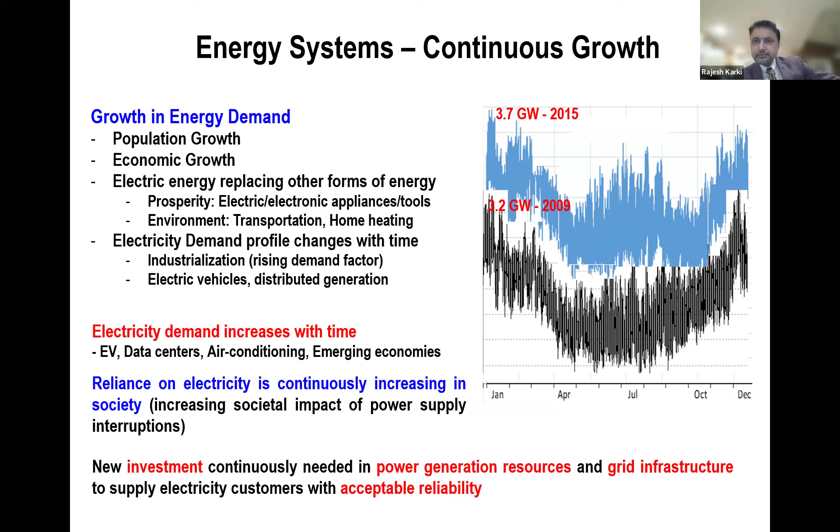Now, why do we have to invest into the energy system to maintain system reliability? Inadequate investment for reliability of the energy supply system means we're going to experience excessive power outages, which means there will be increased power outage costs to electricity consumers. So therefore, we need to invest into the electric energy system in order to maintain reliability.

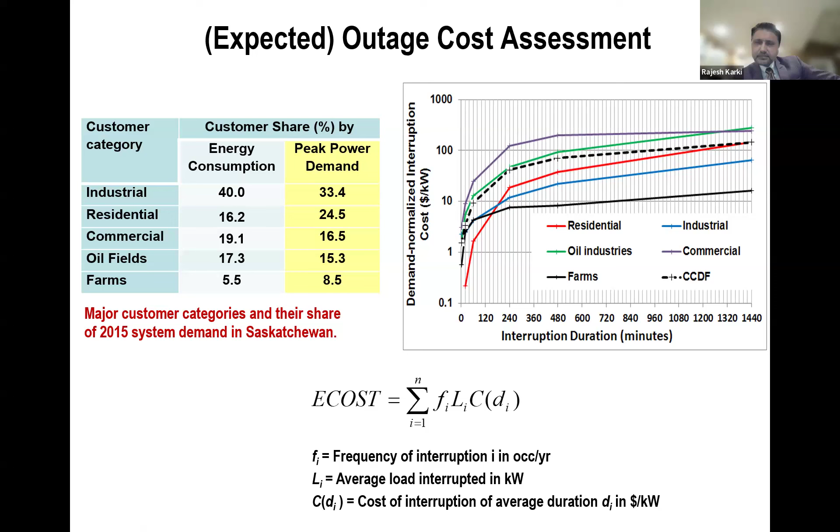So there's a way we can actually calculate that, by knowing the combination of different types of customers in the jurisdiction, and knowing how your dollars per kilowatt demand normalized interruption cost is a function of the outage duration. The longer the outage, the more costly it is. So there's a way we can calculate this.

So this value-based investment approach lets us know what is the right level of reliability we should target when making an investment. That can be done through this value-based reliability investment method. As I mentioned earlier, in order to increase reliability, you have to invest in generation resources.

Now, who pays for the investment cost? The customer pays for that. Who pays for the outage cost? Obviously it's the customer that suffers the outage. So both of these costs are seen by the customer.

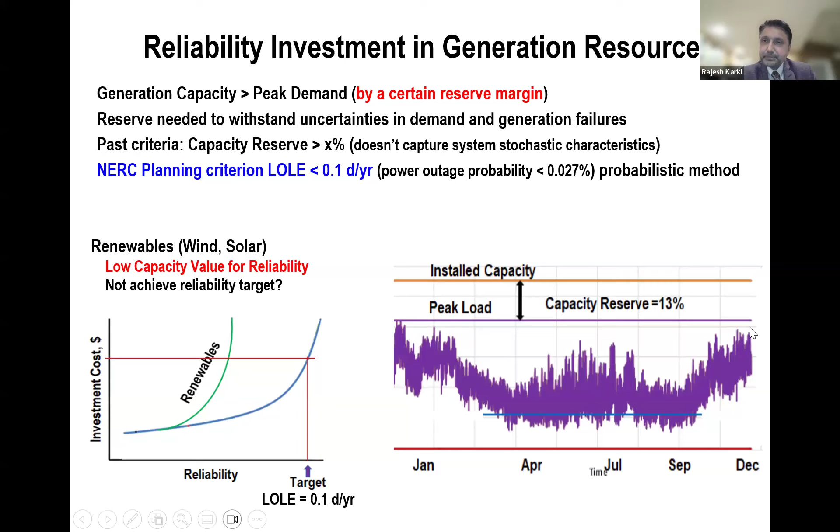A very wonderful presentation, Professor Karki. I just want to ask about the energy solutions, the electricity. But now it is the era of circular economy. So it is said that, for example, electric batteries — the disposal of those electric batteries is harming the environment in terms of carbon emissions and pollution. So what is the solution you suggest for this? Because you are seeing one side of the coin, which is generation of electricity, but what about disposal of electrical products? What are your views about that?

My focus on generation is basically because we're really looking at whether we can afford to maintain the same level of reliability. As I said, since any electric utility's overall investment in the system — over 90% of that is in generation facilities — that's what really dictates the price the customer pays for electricity. My talk is more to do with affordability for customers and reliability, so it's mainly focused on generation resources. That's the broader picture here.

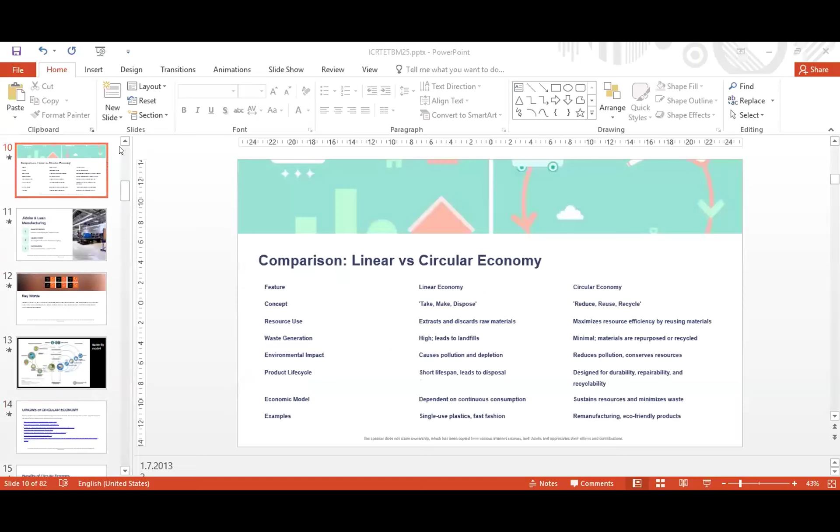Yeah, am I audible? Yes. Sir, thank you, we'll start in one minute. Yeah, we will start in a minute. I hope my slides are visible. Sir, could you please hold for one minute? Now, I would like to call Professor P.K. Kapoor to facilitate Professor H.D. Arora, sir, Vikram Bali, sir, and Shivani, ma'am.

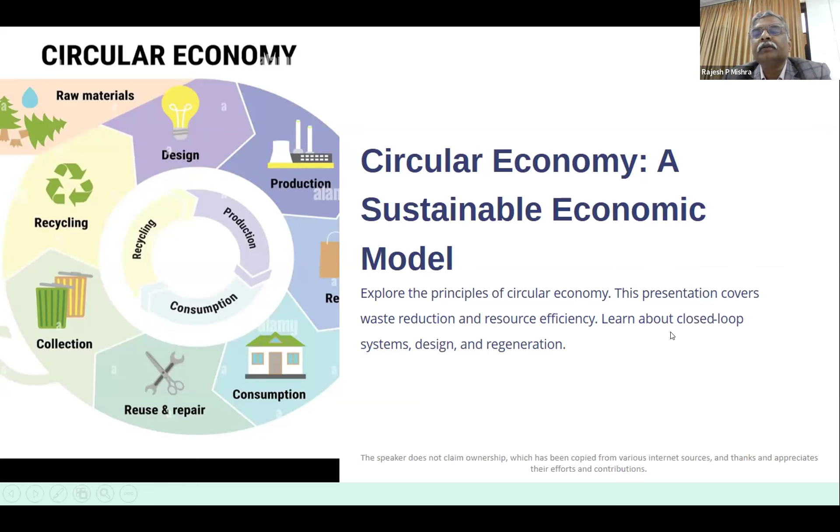So I'm going to talk about exploring and constructing the framework for circular economy. First of all, I want to thank all the people who have designed and developed their frameworks and photos, which I have copied from various internet sources. I'm not claiming those figures are mine, and I appreciate their efforts and contribution towards this field.

To begin with, if we go way back, people started thinking about ecology, climate, and the availability of resources, which bothers the whole world, not only us. It bothers even leaders. You can see all country heads going to a particular place discussing problems like climate change. Probably you might have heard just 3-4 months back.

All country heads met and talked about climate change at the UN. The UN has also taken initiative to develop how we should go ahead in the future, how we should act to save our future generations and their development. Because if the environment is not proper, there will be a shortage of materials, and a big challenge of how they will live, given how abundantly we are utilizing these resources.

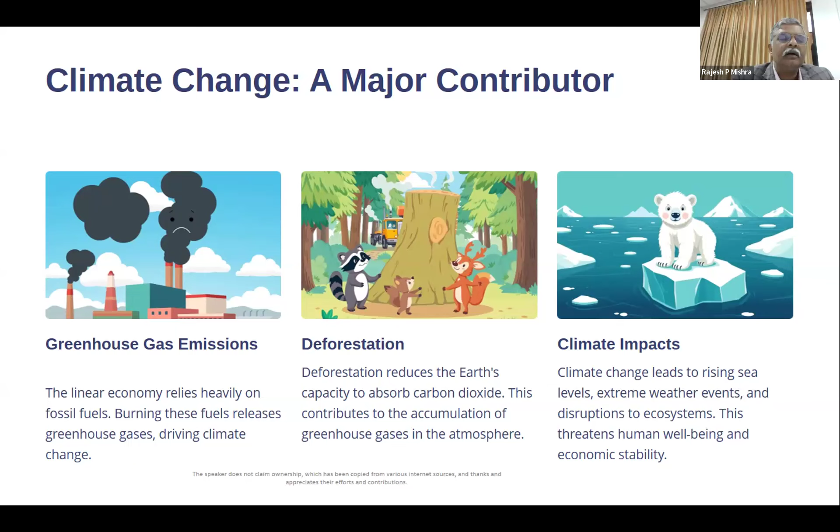So these things are happening because of what we did, and we tried not to understand - we were enhancing the capability in terms of a linear economy. So that is actually bothering.

Once we have these issues, what are the key factors we should take away, and how can we reduce them? Because at this moment, all of a sudden, we cannot go back to the olden day's life and immediately follow those practices. It is completely impossible to go back from 0 to 10. We have to convert our habits and think this through, and this will take us to a lot of challenges and job creation in terms of reducing the effect of a linear process.

So we want to understand how we can do this. It has been proposed by many authors, and I have also started working in this area to understand the circular economy. So basically, what we start thinking is how to minimize first - whatever waste we are generating, how we can reduce it.

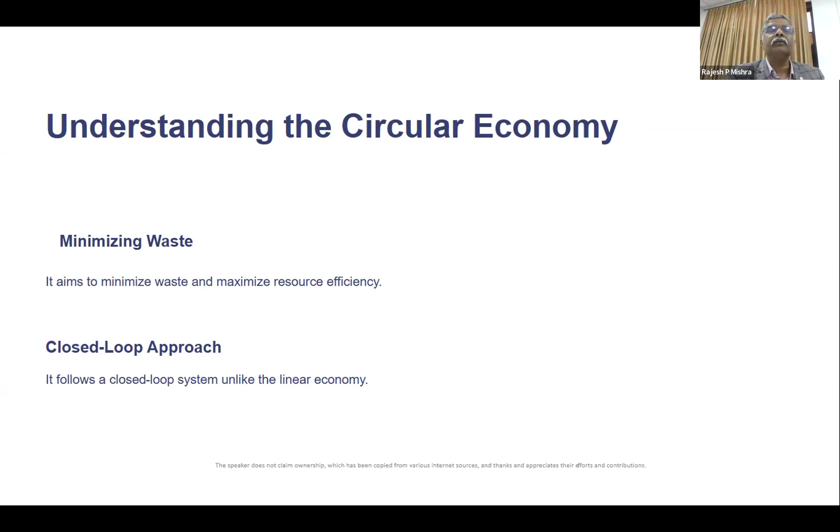We can think of it a little bit like a Kaizen process. We can try to minimize the waste, and we should work in a closed loop. I will show you the diagram and talk about how we can work on a closed loop.

Basically, the key principle which can make the linear line into a circular or curved form is that we should try to discard throwing out the material, or start building a habit of eliminating the waste. So we have to have a lot of solutions for it.

We should start understanding from the design how we take the product and think it over before taking the raw material to convert into manufacturing. How can we design it in such a way that it will be in the circle for a longer duration, and we can try to dispose of it properly. It will be impossible at this particular point, but when we start thinking toward that, definitely we will get some other alternative processes and systems.

Another important thing is the key product which we are using - as we are assembling and converting into one product, you can see if you look at a bike, car, or truck, there are hundreds and thousands of parts which are converted into that one product. Or there are many other electronic devices that may have more than 10 to 20 types of material assembled and converted into the form of one particular product.

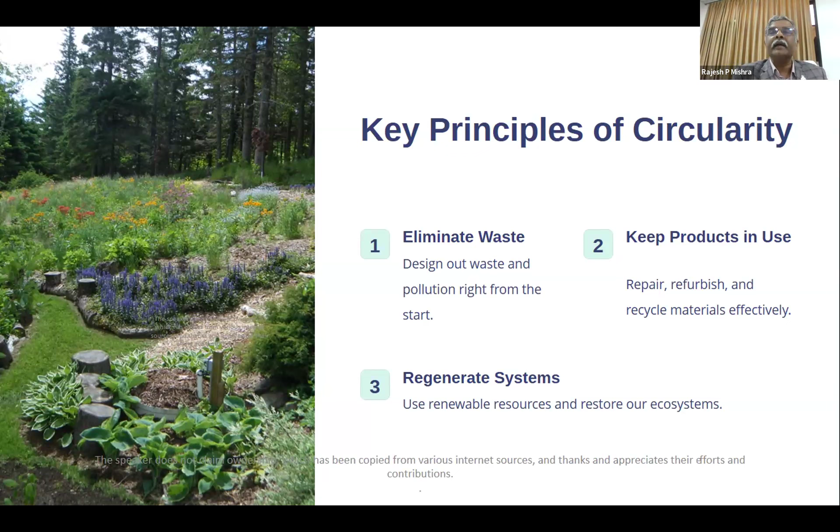I'm just commenting that it's not like things are not happening. Things are happening, but it could happen at a much faster rate than what we are doing still, so we can restore our ecosystem. Looking at these challenges— excuse me, sir. Yeah, sorry, yeah, to interrupt you. Yeah, I'm on the way, I'll tell you the proposed things. I'm on the right track, please do not worry about that.

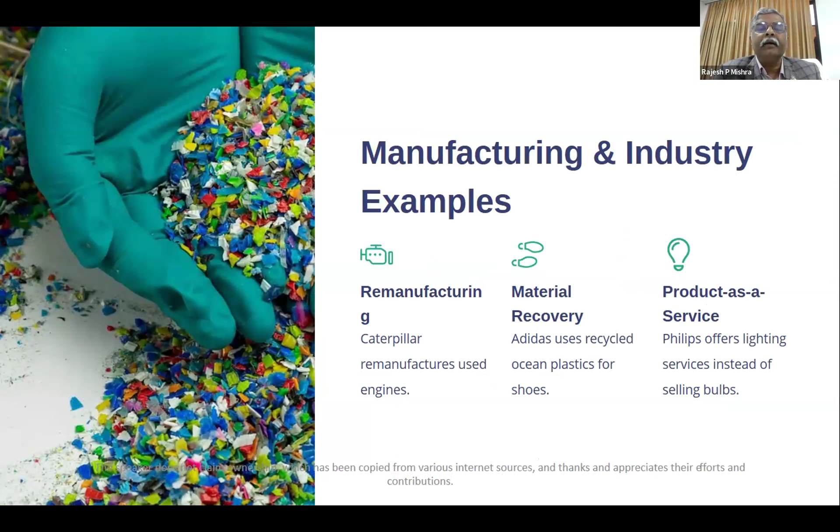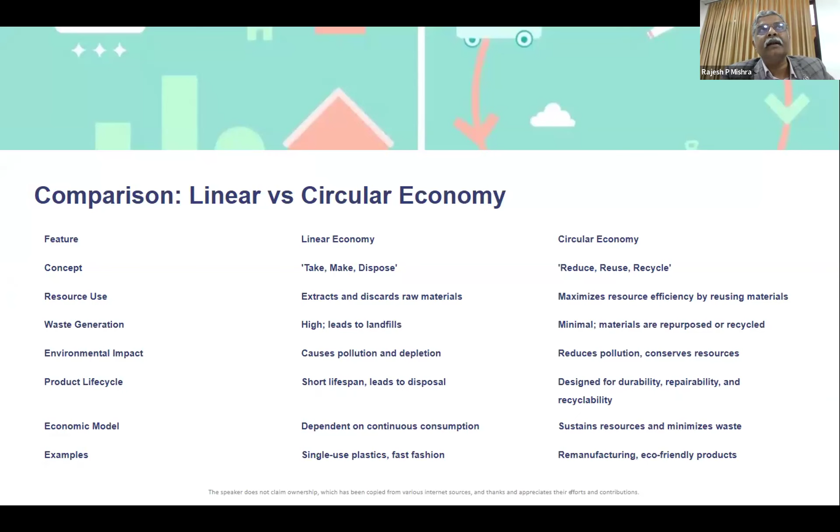So thinking of those challenges, there are alternative solutions available. We have done some case studies, comparing where things have a major gap between the linear and what can be a circular economy concept. Looking at all those concepts, as I've told you, materials can be converted into two types.

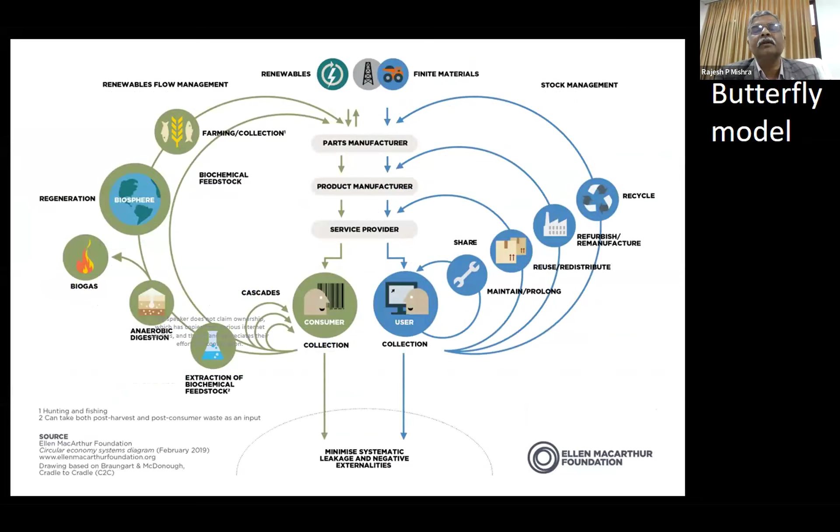One is technical material and biological material. Biological materials are very good to use and dispose of, and there are a lot of methods available that can be disposed of easily back to their original form. But the problem will be mostly with the technical material. So these are the studies we have done.

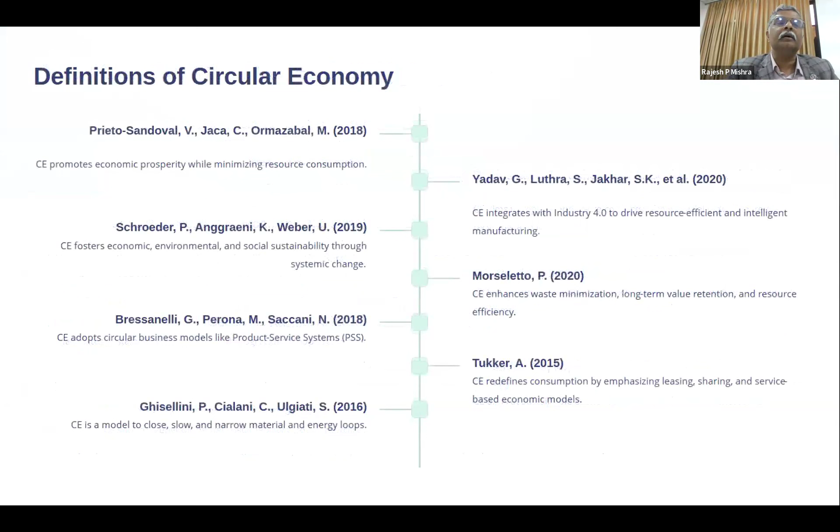The literature review about the present knowledge in our academia—present knowledge available in academia. So our two research practice students tried to collect the definitions and understanding of the system that people have proposed, and we tried to convert that into how many times they coin keywords like recycle, reuse, reduce, and recover.

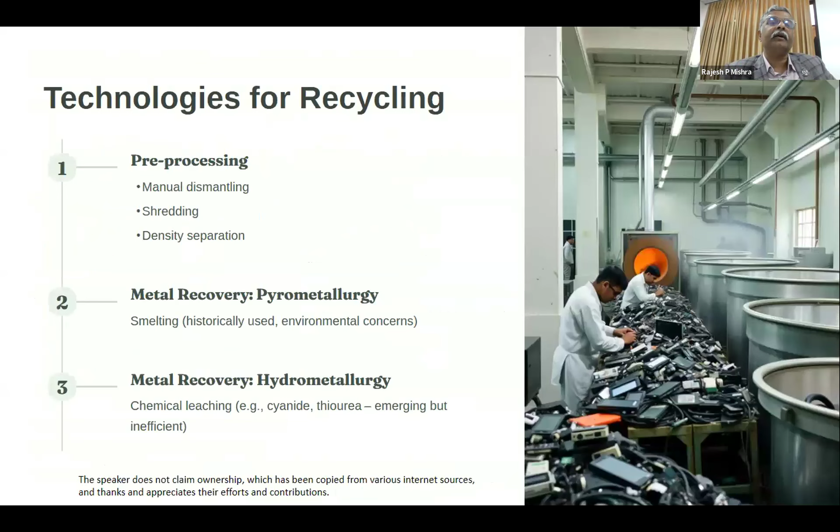One is the case from Indore, and we were able to understand what kind of technological challenges are actually required to handle those issues, and what are the key features which can be taken into our concept and utilized, so a good framework can be developed to solve whatever challenges exist at this particular stage in the manufacturing sector.

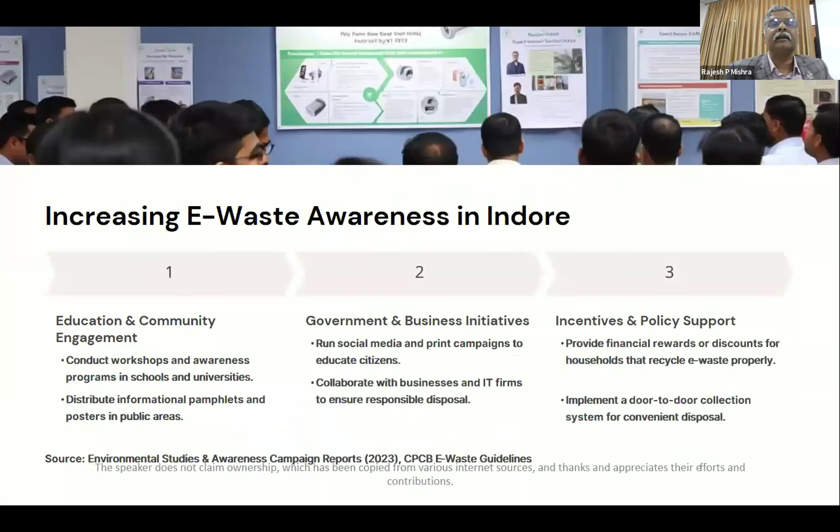So our students have done two case studies which are already present in the literature, and we came up with an understanding to develop a model, trying to understand the given situations and given resources available for the framework.

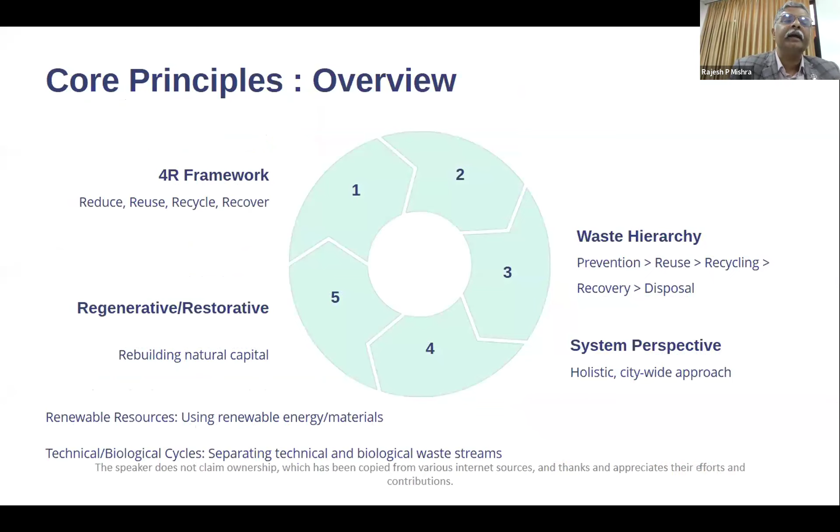So we are trying to propose a more practical framework for our community, which can be implementable, and there will be less hurdles imposed since we are tuned to it, meaning less hurdle to the process.

So that is what I wanted to highlight—these issues and challenges. And we are also coming with proposed solutions which can make them possible; it cannot be taken immediately, but slowly and sequentially it will help reduce the obstacles or problems which are making a differentiation to a sustainable system.

So in conclusion, the feasibility, benefits, and principles we have gathered—we are also trying to investigate the core principles and develop a framework which can be measurable first, for whatever the companies or municipalities are trying to show.

So if we are able to measure, we can set up the current state—this is the current state of whatever work is going on towards the circular economy—then we can set up a goal. So we can have a clear understanding of the gap, and then we can tackle those issues.

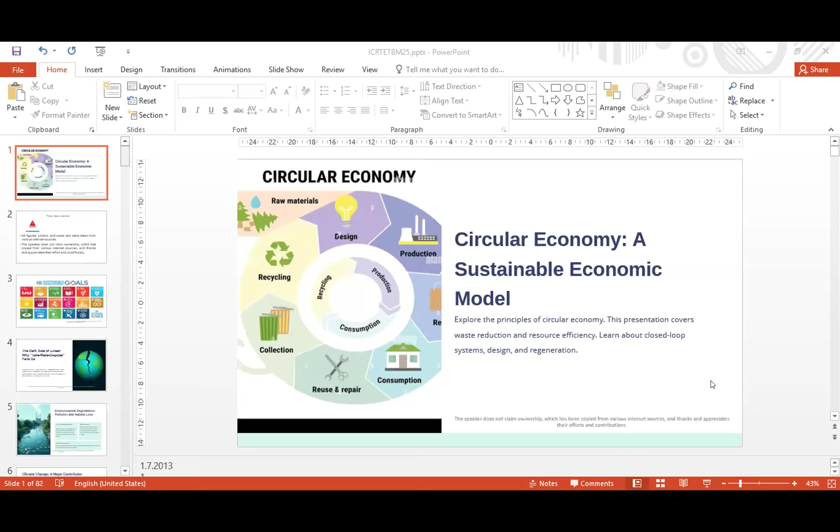Thank you, and once again, sir, pranam to Professor Kapoor. I can see from the back that he is sitting there, so please say hi to Professor Kapoor. Thanks, Rajesh, for coming. Sorry, sir, this time I could not touch your feet. Thank you, sir, thank you so much. Now I would like to call Professor P.K. Kapoor, sir, to felicitate Dr. H.D. Arora, sir.

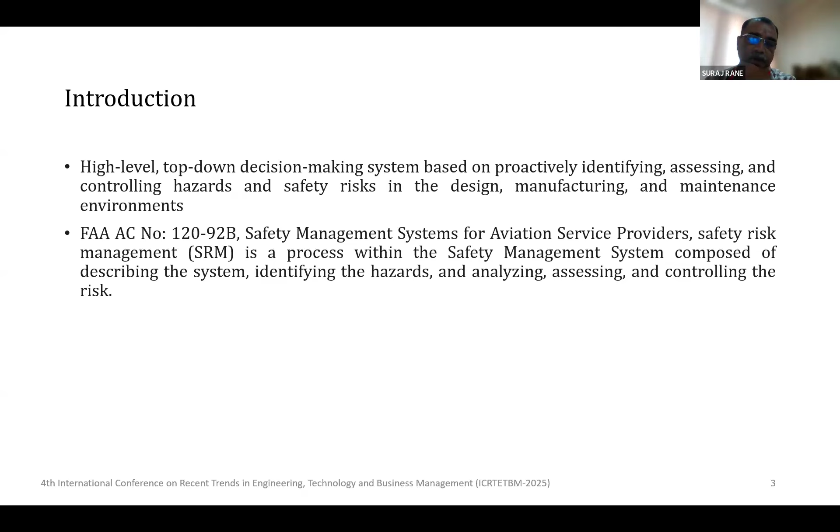What are the objectives in this three-step process? What do people normally follow? The objectives are: we need to identify the hazard, express how it will affect operations, what will be the impact on operations, and how to reduce the chances of causing an accident due to this hazard.

When we do this, we need a complete holistic approach to that process so that we always have things in our control. Normally, we give priority to what we know about the system rather than what we should know about the system. That's the reason some accidents will always creep in.

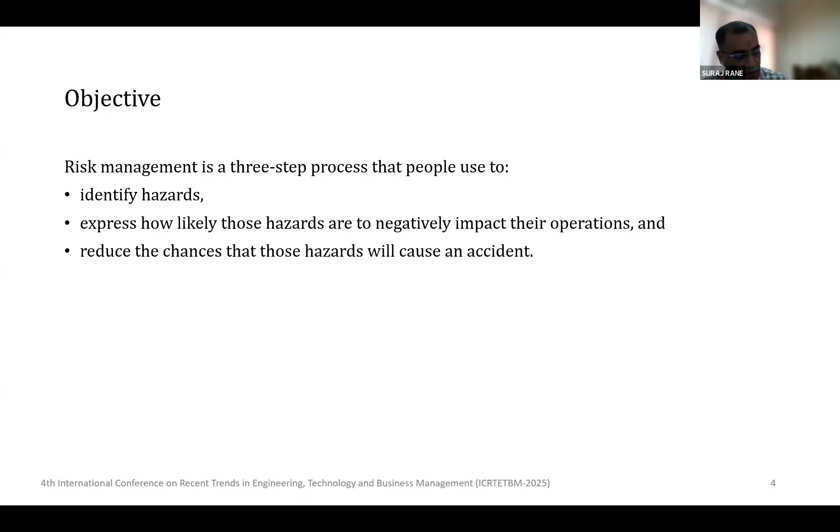I have personally witnessed one incident where the investigation revealed it was a minor flaw which led to catastrophic damage. That particular industry could have saved many people's jobs, because life was not lost, but for a long time the company was closed and jobs were lost, which created lots of social issues. So we have many impacts, not only on operations but also on the employees. We need to take care of those things in deciding how to handle hazards.

Why is this needed? When we go for an accident-free organization, we always get reduced insurance premiums, because insurers see the past record of how many accidents have taken place, and premiums are fixed based on that. Then productivity is improved because no accidents means no downtime, and no downtime means more productive, value-added time.

Since there are no accidents, we have less legal cost and less or no compensation at all, because these are the things which lead to unnecessary cost burden on the company. Finally, the overall reputation of the company is at stake. People in social life will always remember a company for a particular incident. Nobody will talk about the cost, compensation, or premium increase—they will talk about the reputation loss. That is why most companies require accidents not to happen in their plant.

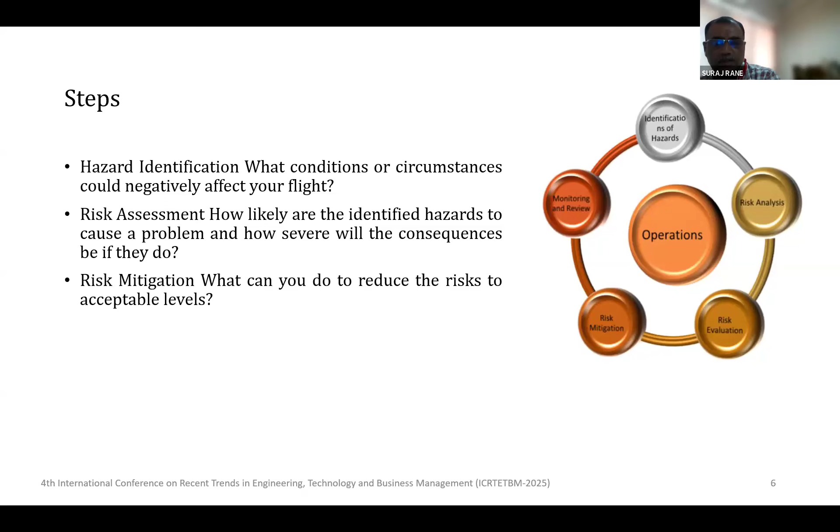What are the steps which are basically required here? In short, we need to identify the hazard, assess the risk, and mitigate the risk. The diagram shown is a standard one used to explain these steps. We identify in a particular manner proactively what to do, how to do it, and how to solve it, because these are proactive actions—otherwise it becomes a breakdown type of effect on safety.

As far as the procedure to conduct the risk assessment, we need to prepare and follow a checklist for the risk assessment. This is always done in consultation with the OEMs of the component as well as the consultant who designed the entire plant, because it is not just individual components that are at risk, but also the connections between components—since a small error at the connection stage can create a bigger problem.

Once your checklists are ready, analyze the past inspections and injury reports, if anything happened before. If not, then maintenance records have to be seen about where the maintenance people have encountered any likely flaws in the process, product, or quality of the product. Sometimes maintenance or equipment quality results in poor quality in the component being manufactured, so that also gives an indication. That record has to be seen if you don't have any accidents till now.

Then prepare and update a safety plan. Based on the past record, if you get something, try to observe that component or similar component, similar situation, similar mitigating or instigating factors, and see whether, as on date, all things are in place. Then check whether we have a safety plan. If you don't have one, prepare it. If you have, update it based on the past report.

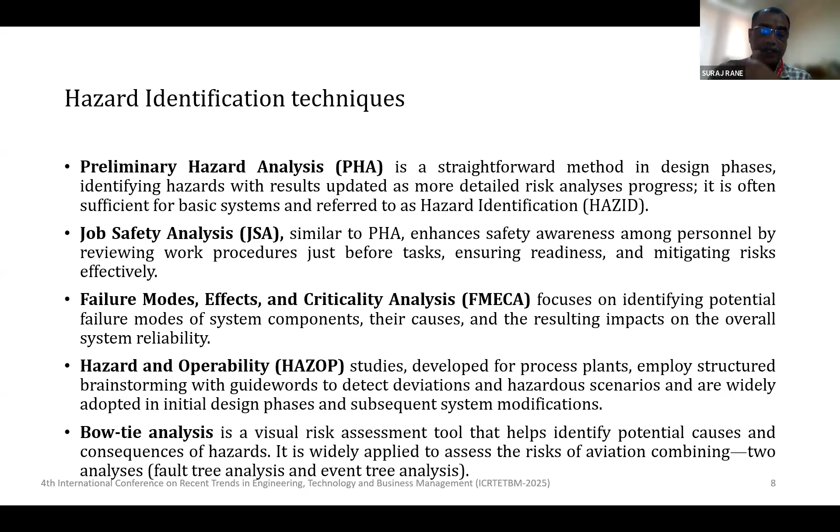Now a small case study - an ongoing process - applied in a hydraulic pump assembly unit exporting the component pump to many places across the country and outside also, where the pumps are mounted on a vehicle.

First, in hazard identification, we identified the moving components of machinery, electrical system, and manual handling of heavy components - all hazardous things present in these types of components. Then in the risk analysis phase, we evaluated the frequency and severity of each hazard, identifying high risk areas such as the assembly line and welding station. Once components and hazard situations were identified, we identified the high risk areas, then moved to risk evaluation, prioritizing risk based on likelihood of occurrence and potential impact on worker safety and production.

In the evaluation phase, we try to check how likely that hazardous situation will create some risk, and what is the effect of that risk on the employee and the process or production. Once you evaluate it, we come to know how risky it is to go ahead with that.

Then we control the risk, implementing engineering controls such as safety guards, emergency stop buttons, administrative controls like safety protocols, regular maintenance schedules, and provide PPE like gloves and safety goggles. Depending upon what the process is, whether it is temperature based, heat based, or chemical based, we need to have a control system on that.

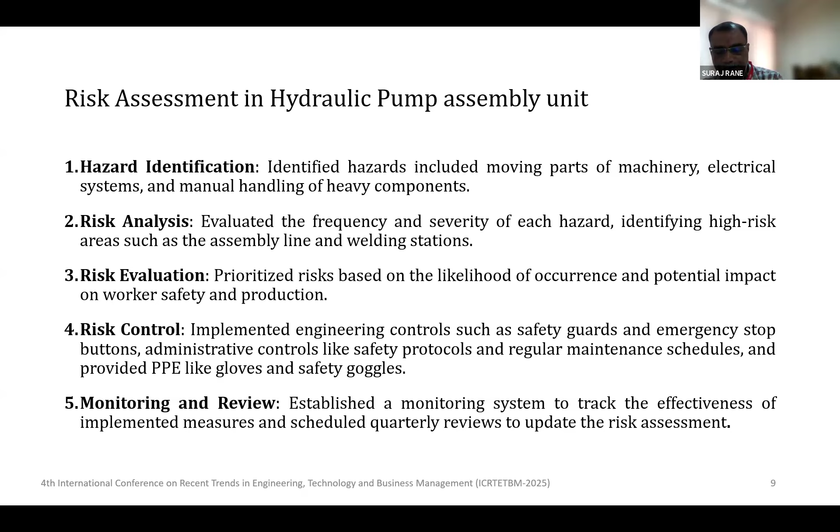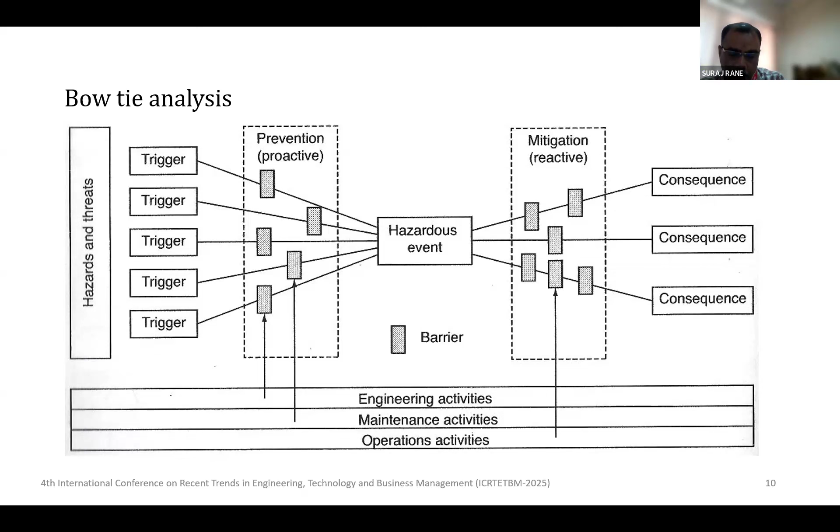In this industry, pump industry, the bow tie clearly indicates the top event in the center, the potential event, and on the right side, the potential consequences. The summary, whatever I just told you, is there on this.

Now, in this case, pump related hazards, what all things can happen here? Pump cavitation, a sudden drop in pressure causing vapor bubbles, air bubbles to form within the pump, leading to damage if not controlled. Second, hydraulic shock, sudden pressure changes due to rapid valve closure potentially causing pipe damage. Then pump seal failure, leakage from the pump seal potentially releasing hazardous fluids.

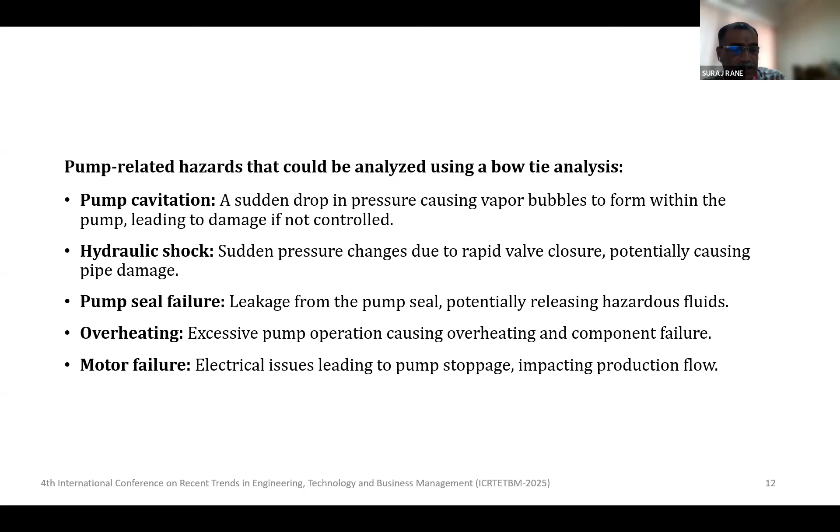Then overheating can happen, because of excessive pump operation, causing overheating and component failure. Then motor failure, electric issues leading to pump stoppage, impacting production flow. All these are things possible in the pump which we have taken for study, and this was done in an environment where some things have failed earlier and some things have not failed earlier. That means reactively and proactively we have to list down all that.

Next tool is FMEA, where if you see, the third column is mode, M, fourth column is effect, E, and analysis comes on all other columns till the RPN. RPN is the number which will tell us which component or which part or which failure to take on priority basis.

Row wise, first component is seal, then bearing, shaft, impeller, casing. For each one, we try to find the mode, find the effect of failure, then how this failure occurs, what is the severity, then what is the chances of occurrence, and the detection. And you multiply all three numbers in the last three columns, column number 6, 7, 8, S, O, and D, and you get the RPN.

5 into 3, 15 into 2, 30. That means whichever RPN is more, like 126 for impeller, component serial number 4, that has to be taken on priority basis. So all those things have to be listed down to study how this can fail, what are the effects, and what to analyze.

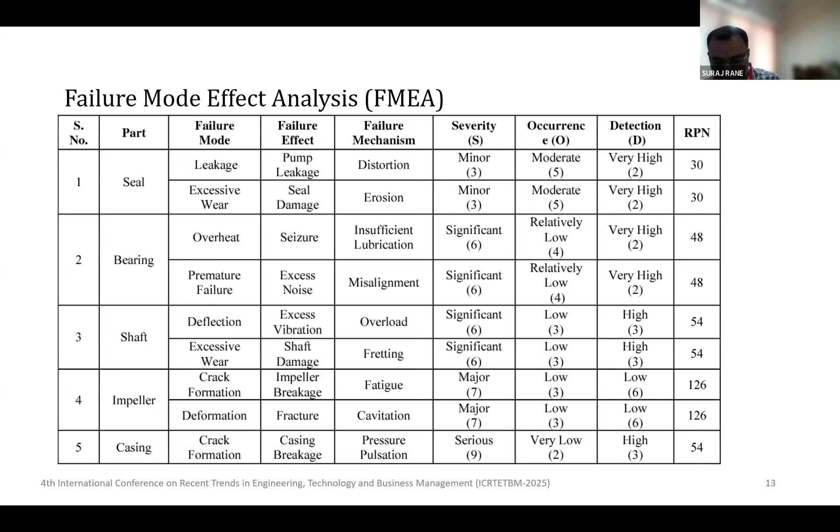So these are the three tools and the procedure for safety risk analysis which are used. In conclusion, this particular technique identifies hazard-based critical events. This strategy helps in understanding the relation between components and its role in plant operation, reduces damage to plant and reputation of organization, and this is beneficial for large systems like defense equipment, nuclear plants, etc.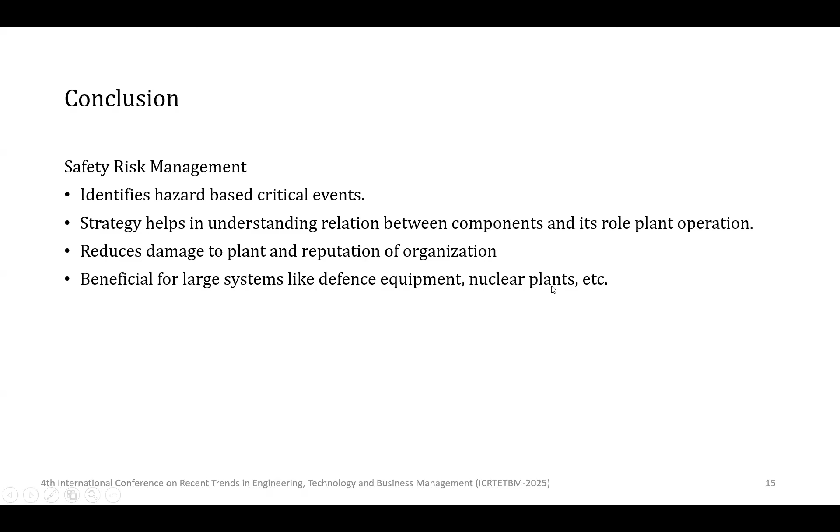Thank you, Professor Rane, for your insightful and thought-provoking session on safety risk management. Your research will certainly enrich our understanding of the concept. I have just one question: what are the various measures to be taken continuously to improve the risk management system?

Thank you, sir, for your comment and motivating words. Risk management means we should be continuously aware of what is happening around us in terms of past accidents and past injuries, and based on that, continuously monitor the steps taken as per the control management document available for components likely to fail. If we don't have a control management system for such a component, we should at least have a control document as per ISO safety analysis, so that any new person taking over that component or machinery follows the safety management, with clearly explained steps taken proactively and reactively.

Thank you, Professor Rane. Thank you. Yes, thank you.

We will be talking about explainable artificial intelligence in healthcare, because healthcare is one of the areas in which artificial intelligence is supposed to have a lot of scope. If you see research articles in different journals, you will observe that a lot of work is being done in this area. Several medical agencies and government agencies are spending a lot of funds on implementing artificial intelligence in the domain of healthcare. There are several reasons why artificial intelligence is being seen as a potential tool in this area, and some of these are listed here.

We need some potential tool or technique that can help in increasing life expectancy. It is also observed that there is a lot of increase in chronic diseases.

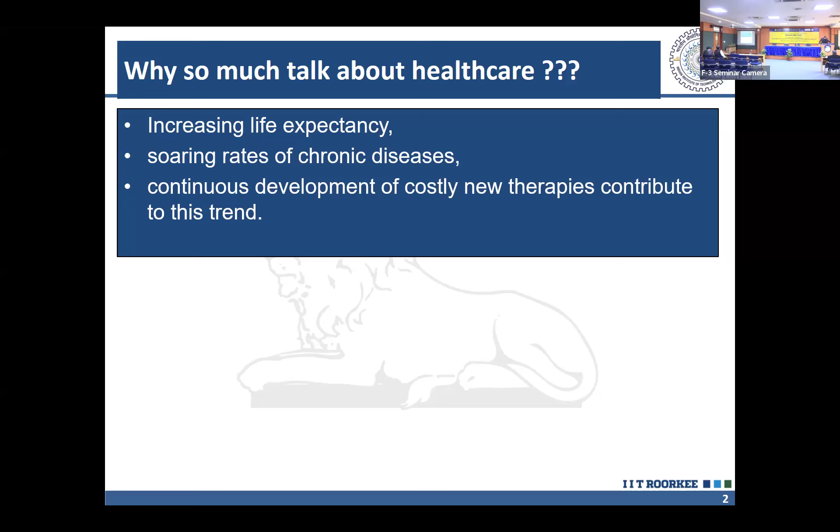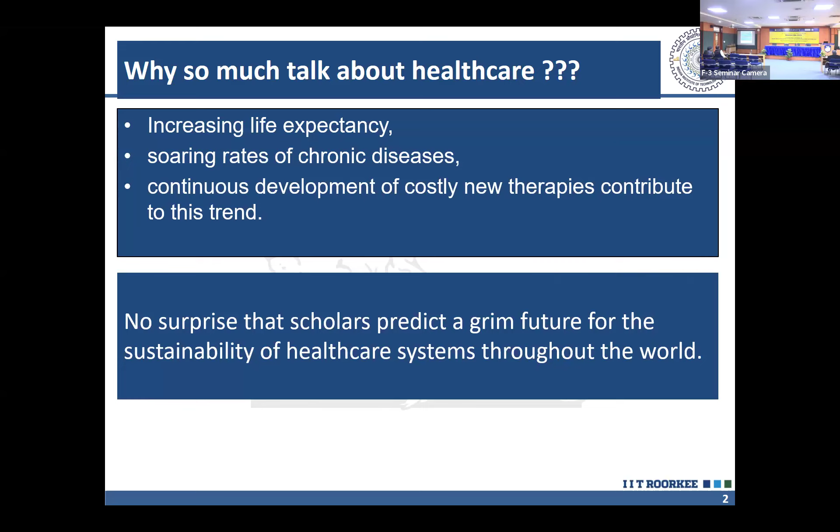There are new therapies because there are new illnesses and new diseases being developed, and we need something that can make these therapies more affordable. If you talk from the point of view of social scientists, they say the future sustainability of healthcare systems is not very bright unless we have a very potential tool. So what can AI do here?

Since most of the data can now be digitized, and we know AI can work very well when it is provided data, we can use it for analyzing the vast amount of data being generated through different medical areas.

AI can help in reading prescriptions and drawing a meaningful outcome from it. AI can help in analyzing the data generated by different signals from different machines in healthcare and things like that. With the help of AI, we can identify and recognize patterns, following which we can recommend a good solution, or possibly an optimal solution.

Area-wise, artificial intelligence can be applied to almost all areas, including hospital management, from the management point of view, the doctor's point of view, and the patient's point of view for health monitoring. It can also help with early detection, diagnosis, treatment, anomaly detection, and image processing, finally leading to good decision making. So we call it clinical decision support system.

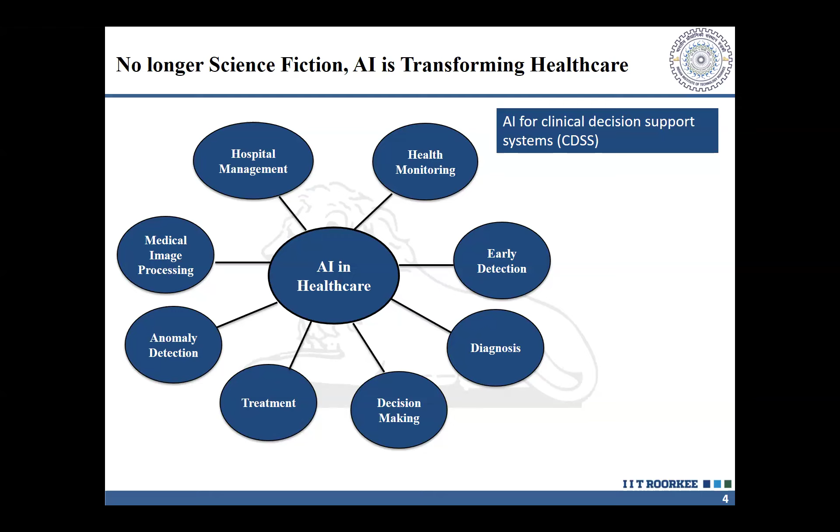AI can be a potential tool in developing good clinical decision support systems.

So in the previous slide, we saw that AI has a lot of potential - at least that's what researchers think, that's what researchers predict, because AI on paper, at least, has shown to give very good solutions to very complex problems.

So what exactly is the issue? The issue is human life. Whenever a human life is involved, making decisions becomes very critical. One has to make decisions in a very informed manner, and a lot of uncertainty is involved.

Just give me a second. Ma'am, please continue your presentation. Ma'am, please unmute yourself. Sorry, I forgot that I was still muted.

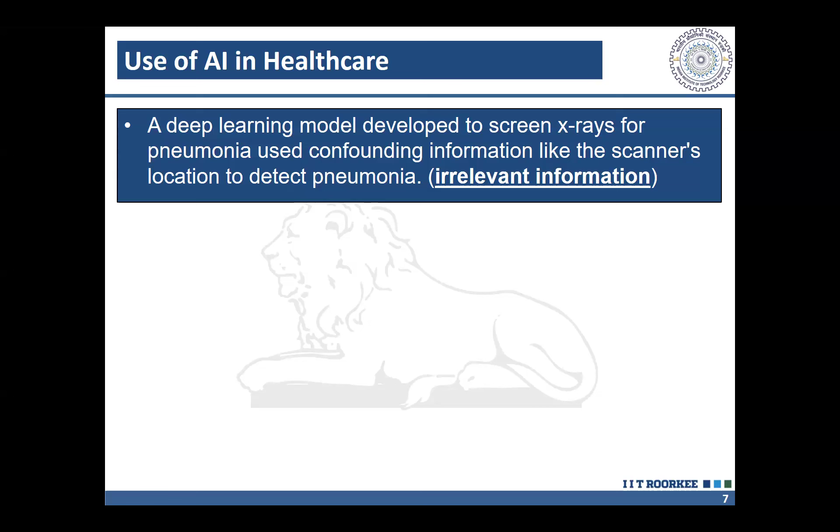There is one example in which a deep learning model developed to screen X-rays for pneumonia used confounding information like the scanner's location to detect pneumonia. This is completely irrelevant information. Perhaps the data was not fed properly into the system, besides adding relevant information, irrelevant information was also fed into the system.

Another example was that patients with asthma were found by a deep learning model to be at low risk of death by pneumonia, because the model learned from a training dataset that included a group of patients with asthma who had active intervention from clinicians. Now even a person with very small knowledge of medicine or healthcare will know that if a person has asthma, the risk of dying from pneumonia is quite high. They are not at low risk.

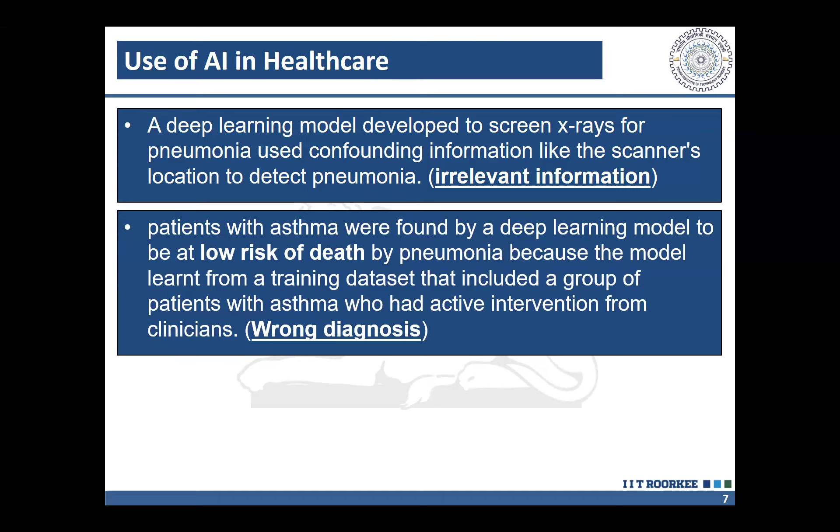So this was again a wrong diagnosis, and if such a diagnosis is implemented, it will become very critical for the patient.

This is another example in which a model developed by researchers from Mount Sinai Hospital performed very well in distinguishing high-risk patients from non-high-risk patients based on X-ray imaging. By the way, Mount Sinai is one of the hospitals which actively uses artificial intelligence, they have a proper R&D lab where they make use of AI tools.

So what happened was that when the tool was applied outside Mount Sinai, the performance deteriorated. This happened because the data used at Mount Sinai was only of patients from its hospital, from a particular region nearby. So it was very biased data, and if that tool is applied to data anywhere else, the results are not likely to be good.

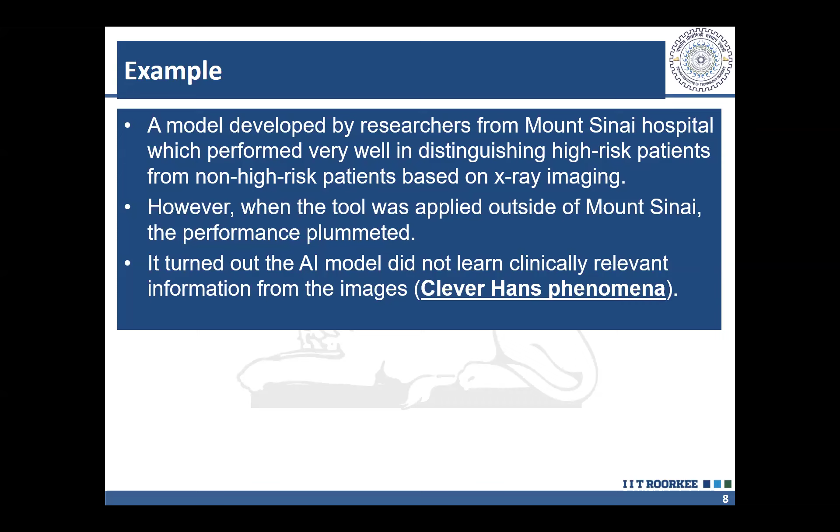There are several examples. During COVID times, a lot of work was done. A lot of researchers used artificial intelligence algorithms to develop tools to help diagnose COVID and so on. In this example, the datasets constructed to identify COVID-19 from X-ray images were biased, with positive and negative images taken from different sources.

There are some other examples as well. Sorry to interrupt you, ma'am, please try to conclude your presentation. Ma'am, please try to conclude your presentation.

So thank you, everyone. Any questions?

Ma'am, thank you for this wonderful presentation. I'm not sure if it was wonderful because I hardly got 10 minutes to speak, but thank you if you appreciated it. But you can take 5 more minutes, ma'am, no issue. Absolutely fine with me, you should have told me in the beginning that I would not be given more than 10 minutes. First of all, I was started 20 minutes late, but I'm thankful to you for calling me here. Thank you.